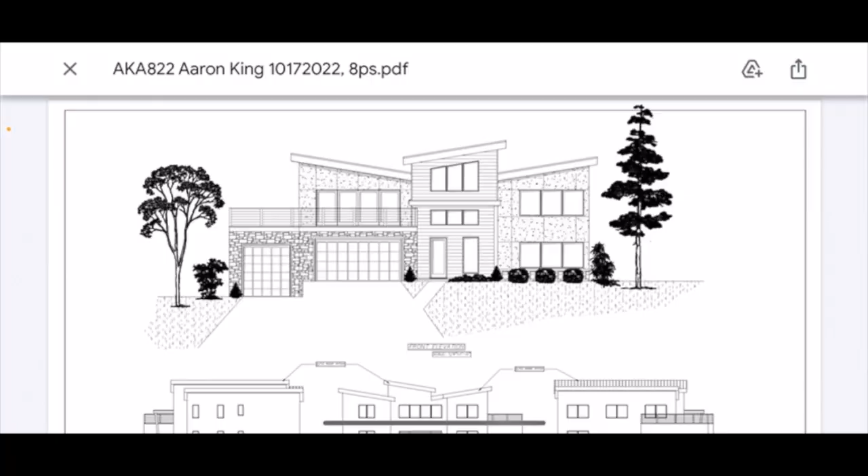Okay guys, so this is what the plans will look like when you get them back from B&G. They look real similar to something you would buy out of a book, but obviously you get to customize every detail. Real quick, the front elevation, they'll usually put some generic siding on there. We kind of talked about it. I'm going to probably do Nichiha wood siding on this front tower here, and then probably some stone around the garage below.

Everything else is going to be stucco. So he just kind of generically filled that in so he'd get a feel for it. The landscaping is all generic. Obviously nothing but ponderosa pines in reality.

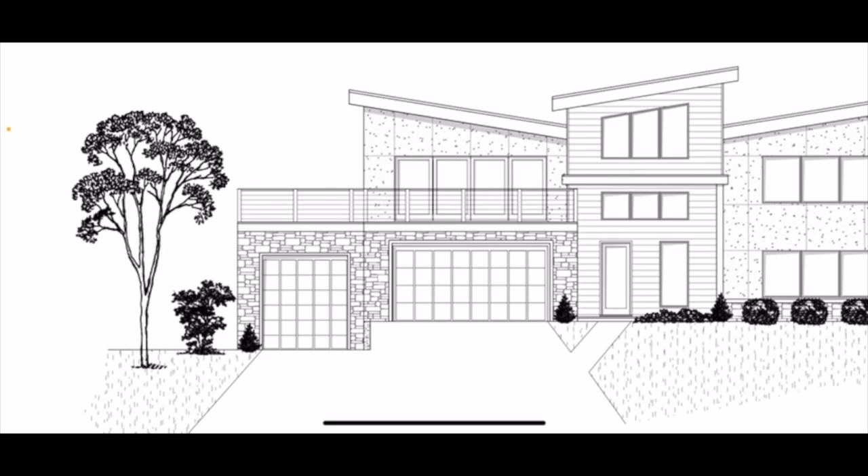So anyway, the balcony is kind of the real flashy piece on the outside front that kind of wraps around the back and goes over there to look down the mountain with the awesome view. That balcony is going to be really one of the spots on this house.

The third car garage, if you notice, it steps down 3 feet. That is an owner's lockout that's going to be tall enough for an RV. I do have to push the wall back a little bit from what is drawn, because I forgot to tell him to do it, but otherwise it's awesome.

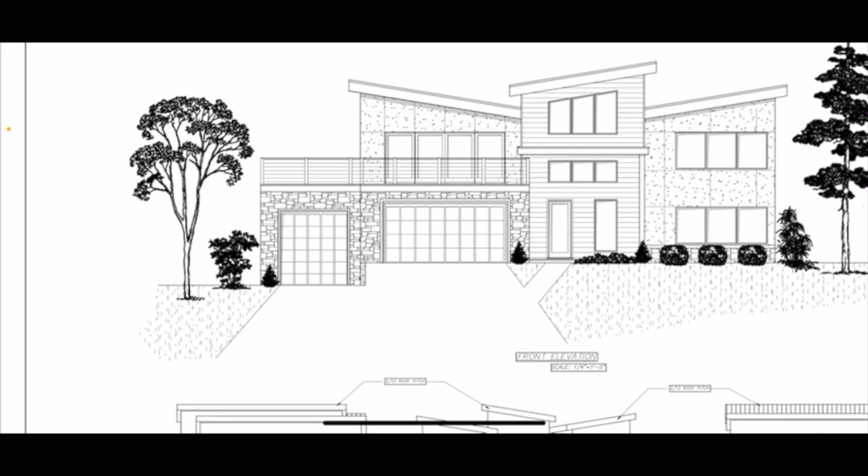So the back elevations and side elevations are usually left really clean. It makes them easier to put a scale ruler on and everything else, because it just kind of gives you an accurate representation of where everything is placed from the outside.

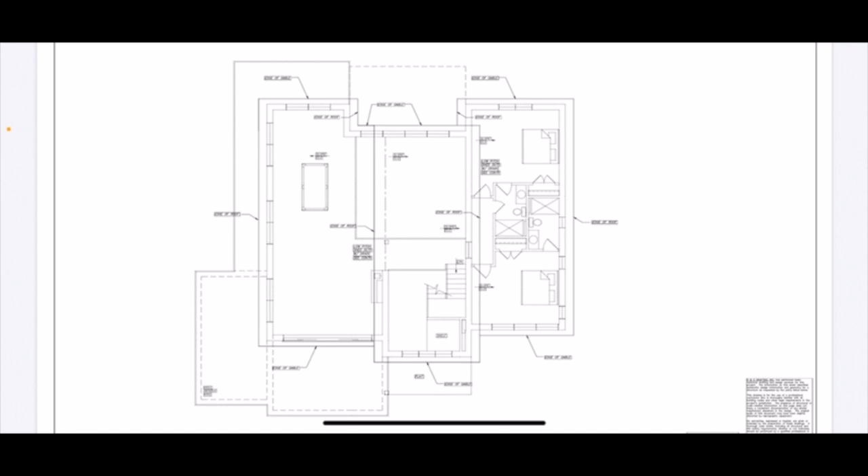So, coming here, you get a roof design. Most roofs are hips or gables, so they're going to have a lot more lines on them. Obviously these flat roofs, there's not a lot of detail from above, but you can kind of see what's going on there. So now the first floor.

I'll kind of get into my thought process, and it's different than if you're doing this for your forever home, a house you guys are living in, and only you. So for a VRBO type situation, a luxury VRBO, what you're going for is wow factor and practicality together.

So you got a 2-car garage, it's available to the people staying in there. Also the entryway for anybody that's parked outside leads in. It's got about a 20-foot ceiling, cool, it's going to have some cool, probably antler chandelier or something, kind of give it that mountain modern look. You walk in, you've got a lavatory right to the right, just a powder bath.

The stairs are open that go upstairs, you'll see them from the entry. And the great room is also open to above, so you got a bridge that kind of separates the two spaces. Really similar to the big house that you guys have probably watched me build over the last couple of years. And that's a really cool wow factor.

The kitchen is pretty basic, but big and functional. We're going to go with very modern cabinets, kind of the mountain modern. I think most of your casework should be clean and modern, and then a lot of your furnishings should be rustic. Like the fireplace, instead of it being that cool large format porcelain, it will be rock to give it that mountain feel.

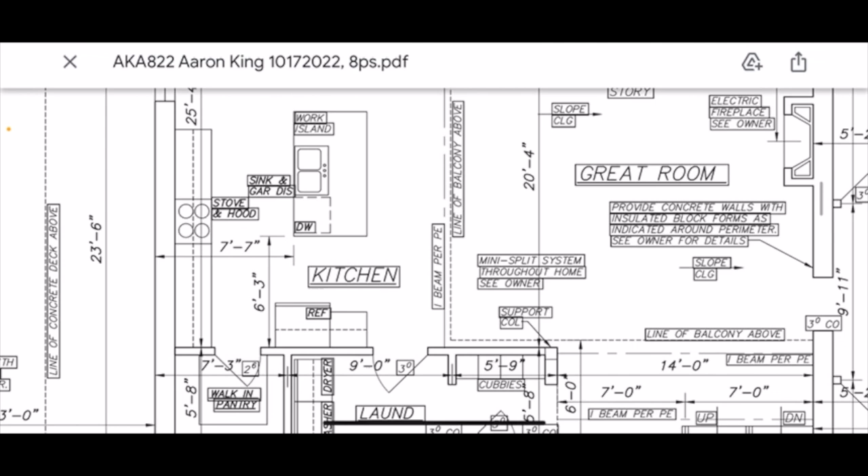But you got a nice island to work off of, I think it's 7 foot by 8 foot, or maybe 7 by 8 by 4, something like that. And then the big run of cabinets down the one side with the stove, the fridge. I'm still thinking about putting in a double fridge there, I've got the room. And just nixing the pantry, but the pantry might be a little more valuable, but it has a walk-in pantry right there.

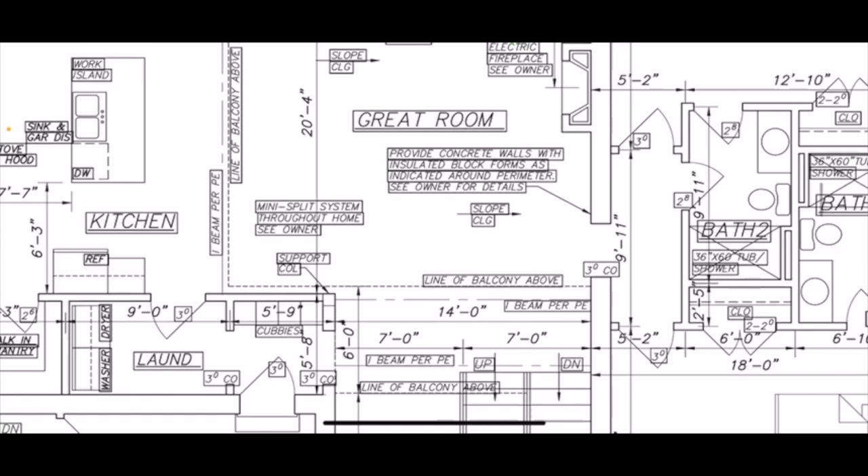So, I don't know, but it's going to have a mud hall coming in from the garage with the laundry, and it passes through over here. It all kind of goes in a circle, which is nice for traffic. And the great room is nice and big, leading out to a cool deck.

Really cool area. The bedrooms, when we're talking VRBO, you don't need big closets, okay? That's one of the big differences. You gain nothing from a big master closet. No one's ever there long enough to get use out of that space.

So you keep that room for the bedroom itself, and you manage to put a full bath on each bedroom. They don't have to be huge baths, but full baths, walk-in showers or tubs, and their own toilet and vanity. Although you do need to leave one of them open to the hallway outside.

This is exactly what we did in Dauphin Island. We have 6 bedrooms with 6 baths, but 2 or 3 of those baths are actually open to the common space as well. So people staying on different floors don't have to run all the way up or down to get to their bathroom if need be.

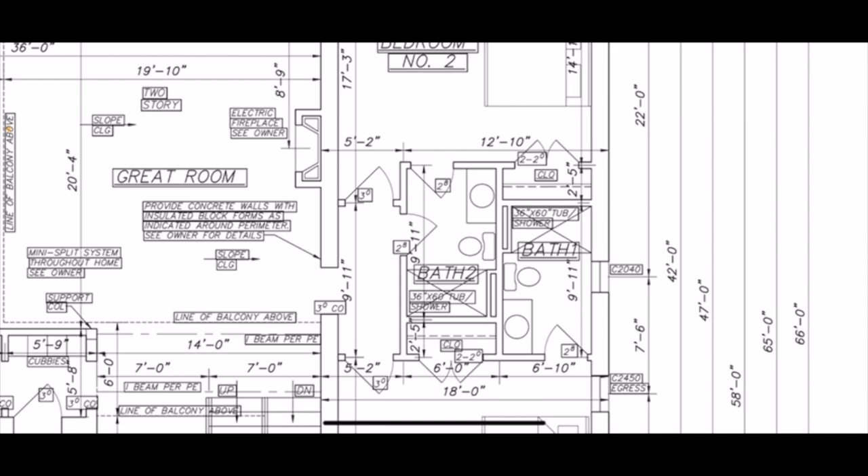So that's really the kind of important design elements of the main floor.

The upstairs is just a lot of wow factor and more sleeping capacity. You get up there, you've got your balcony, which is kind of a bridge that goes between the entry and the living room. And it leads to the rec room, pool table, probably a pinball machine or 2, or maybe a video game, an old school retro game or something. It's got a wet bar and a family room area as well, probably a little area for gaming consoles right there.

The big part is it leads out to this amazing concrete deck that is on the deck above the garage. So I'm probably going to push this wall back somewhere in the middle of the screen here, just to give myself some more room in that garage bay, but also make the deck bigger, because the view off of this corner right here is going to be spectacular.

So part of me wants to put the hot tub up here for that awesome view, but probably it's going to go in the basement, or outside the basement, and you'll see why in a minute. Again, bedrooms are almost identical to the ones below, just nice big bedrooms with their own bathrooms.

So now let's go to the basement. This is where the design sort of slipped away from me a little bit, but I think it actually turned into a little bit of a stroke of genius, because down at the beach, even though we're adding pools now, we've done very well over the last 6 years not having pools, because we're right at the beach. You swim in the ocean, blah blah blah.

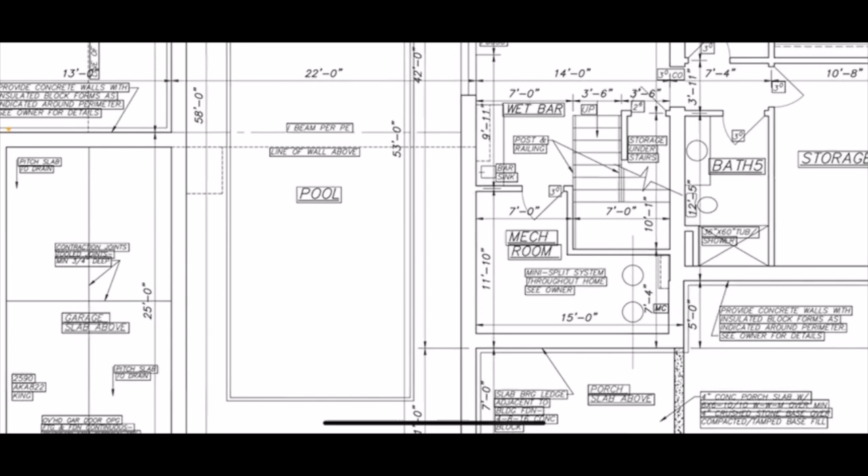This is a bigger pool than most hotels have, guys—it's like 15 by 34. I've got a 50-foot long room here because, if you notice, I'm under the garage, because Lite-Deck gives you that option. In a lot of garages, especially on the side of a mountain on a walkout, you'll end up backfilling the backside of the garage with 10 feet of fill sometimes. By the time you've spent the money to do that, you could have put in Lite-Deck and had a room under there. We see that more and more these days.

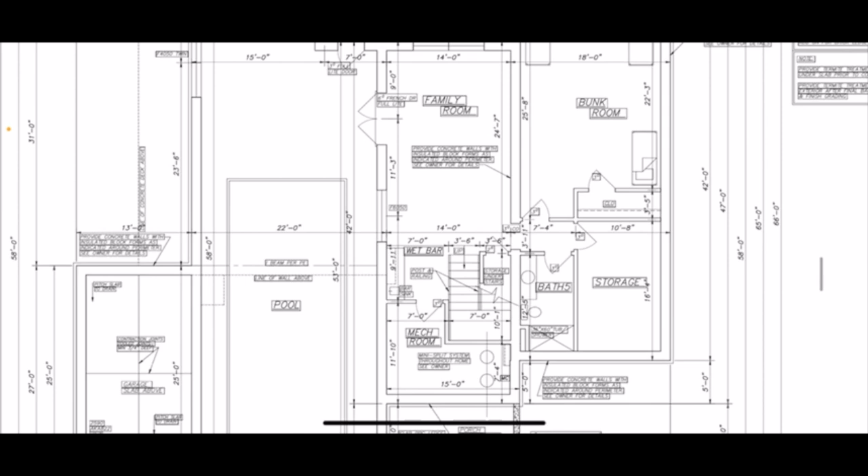But this is giving me the opportunity to have a legit, full-size, awesome indoor pool, which I think is going to attract renters at a much higher rate than if I didn't have that amenity.

Because once you get here, you go to Walmart the first day, you never have to leave. The ski slopes are literally out the back door, mountain bike slopes in the summer, whatever. And you ride the lift back to the house.

I am so excited about this. That feature, I said it as a joke originally—I said I'm a pool builder, I got to put a pool in the basement, and I was joking. And then I'm like, wait a minute, that would be amazing business-wise.

Obviously it's going to have to be maintained. We're going to do all automated IntelliChem so we can manage the pH, and we're going to have an in-floor cleaning system. So I'm hoping to get the actual human inputs down to once or twice a month, because I'll be able to monitor the water chemistry from Missouri digitally, and I can run the floor cleaning system from there as well. So I think it's a no-brainer, I think it's gonna be cool.

The content that we're gonna be able to bring you guys next summer, as far as training opportunities and everything else—ICF pool, Fastfoot, monopour, ICF wall building, window bucks, door bucks—but the big part's the Lite-Deck and hydronic heating. This is truly the way of the future to build houses, and not really my opinion, it is the way, as we move into more sustainable builds.

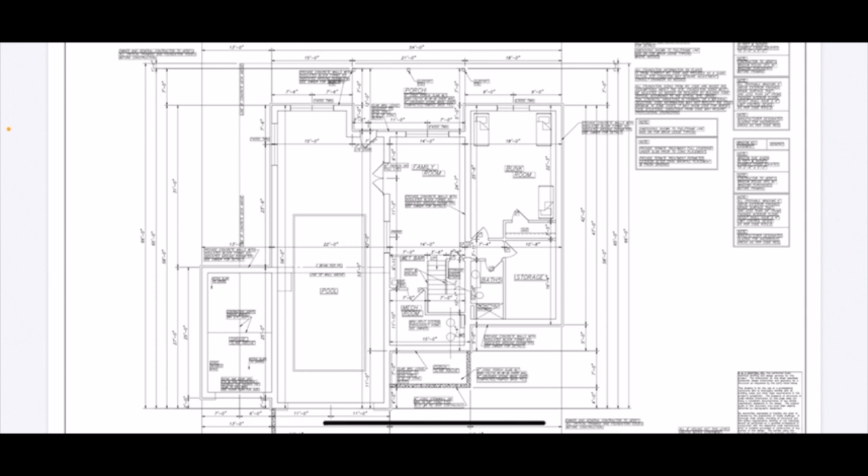Yes, these are more expensive, but not a lot more expensive, and they last generations with very minimal upkeep once they're done. And this one, because it's mine—a lot of my clients wouldn't want me to talk about costs, what they're spending, whatever—I'm going to walk you guys through every nickel that we're spending.